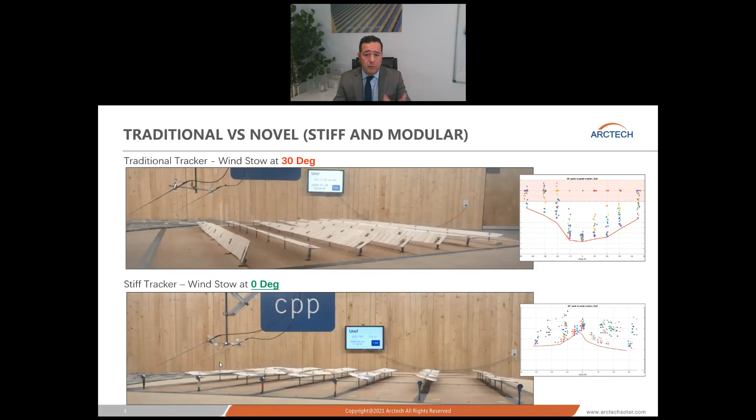Just two more notes on this one, because I presented all these in previous webinars. If you guys are curious, just reach out to me, and we can take a deeper dive on this one. But basically, it's important. Let me just stop this. It's distracting.

If you compare these two maps, these are the stability maps for the traditional flexible tracker, and the stability map for a rigid tracker. And what you can see right here is that the worst ever position for a traditional flexible tracker is when the tracker is flat. You can see the lowest critical wind speed. Critical wind speed is the wind speed upon which the tracker starts deflecting too much, okay? So the worst tilt is around 0 degrees, okay? On the other hand, the best tilt here is around 0 degrees, okay? So you can see that by just rigidifying the tracker, the dynamic behavior changes completely. I'll come back to this later.

A few numbers for you. So, these are typical numbers of all traditional trackers in the industry right now. By the way, this was our old Skyline tracker. It was very typical to mount this Skyline tracker in a 3-string configuration. So you used to have like a 100-meter tracker with a fixed point in the middle. So kind of like a 50-meter wingspan on either side. And those trackers must stow at a steep angle, either 30 degrees or 45 degrees, as you can see here.

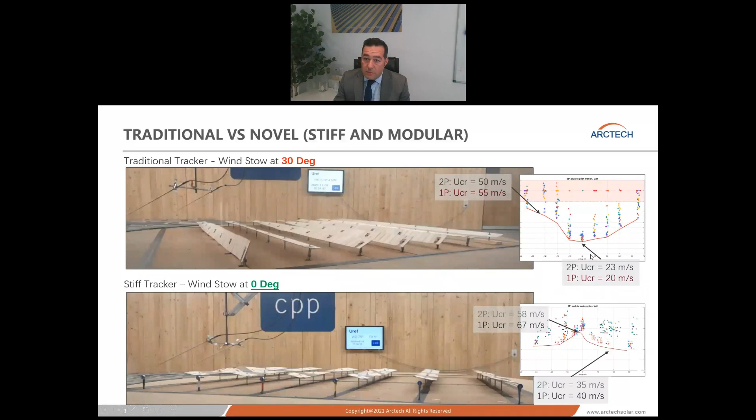Now, instead, these trackers right here that are very rigid, for starters, their minimum critical wind speed is larger. So we went from a minimum in the 20s to a minimum in the high 30s. And then the location of the minimum is different. The minimum here used to be at 0, like I said before. And the minimum here in this one is at steeper tilts.

Now, just one more note, and without getting into heavy physics here, but what drives this effect is basically stiffness. And what drives the critical wind speed at steeper tilts is more damping ratio. So these trackers right here have just one fixed point, one slew drive in our case, and then plenty of dampers along the torque tube.

As a matter of fact, we use up to 6 dampers in the exterior rows and up to 4 dampers in the interior rows. Here, we have more slew drives, more fixed points, no dampers whatsoever. And that's why you observe these small drops right there. Because if we were to put more dampers, this would likely be a flat line. Okay?

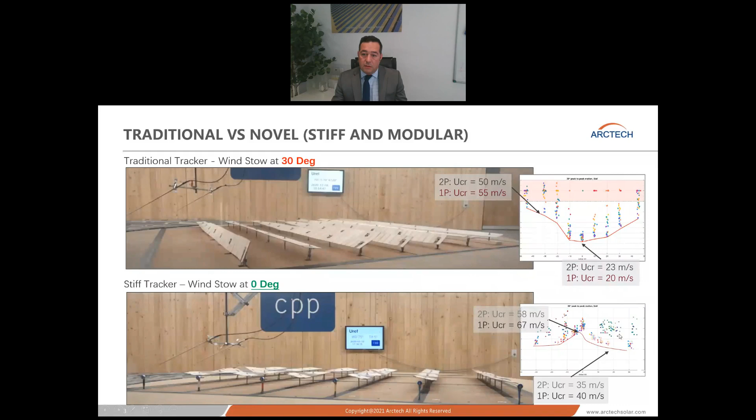Well, anyways, moving on. So, why should we use rigid trackers today in 2022? Like I said, because we have the highest stability at all tilts, and because it protects the panels. And we're going to talk about the panels a little bit, but if you remember, the panels used to be a 2 square meter surface, 2 meters by 1 meter, and today panels go up to 2.4 by 1.3.

That is 56% more surface, which means that, when the wind comes, the effects on that larger surface are much more severe. We are all familiar with that old IEC limit at 2400 Pascal, and we have to do load tests at up to 2400 Pascal. Guess what? Not one of the new panels withstands 2400 Pascal if you mount this tiny purlin right here at 450 millimeters. So those ratings have come down.

So if you keep stowing your trackers at a steep angle, you are putting your panels in trouble. As a matter of fact, you are generating damage to your panel, and that's that. Okay, so I'll talk about that in a little bit. So these two things are problems that stiff trackers resolve. The third thing is value that the stiff tracker brings. If I have a very rigid tracker that does not deflect, I can stow that tracker flat, and I can increase its wind stow threshold.

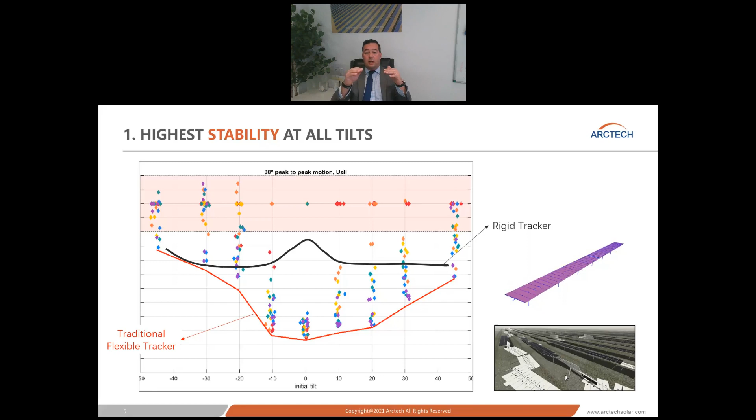Now, if you have a rigid tracker, this is how the curve looks, superimposed. Okay? Like I said, at 0 degrees, it's actually the highest critical wind speed, but anywhere else, it's much higher than the red line. So that's why I can increase my stow threshold, because I'm so very far away from the black line, and I have no problem whatsoever. If you have a traditional flexible tracker, and now you mount larger panels, your red line actually shifts down. So your wind stow needs to shift down as well.

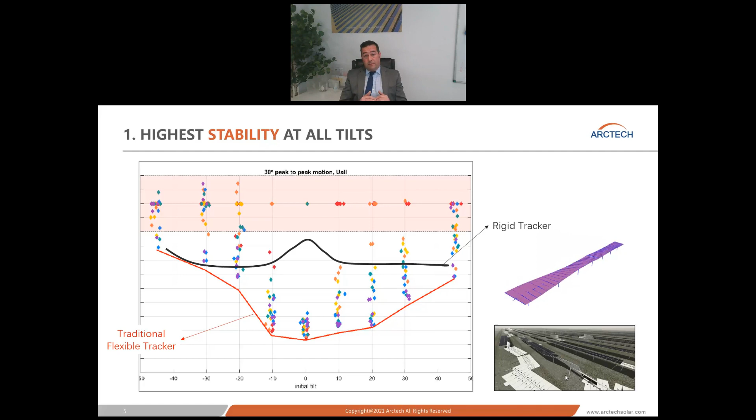Okay? First thing. Second thing, this is what happens to panels if you insist on stowing them at steep tilts, at 30 degrees and 45 degrees. If you have a traditional flexible tracker, you must stow them at steep tilts. Otherwise, your tracker flies away. That's not good because, after the windstorm, there are no assets. Not good, right? But you also must protect the modules.

So people that still install traditional flexible trackers, they go and they swap panels after the windstorm. Maybe you don't see damages, as we're seeing here in the picture, which happen, by the way. But other common damages are cell delamination, micro cracking. So after the windstorm, you go to your SCADA, and you see a bunch of strings that are performing at 80%, at 60%, 70%. Guess what? The panel has damage. It's just not visible damage, but people will go swap panels. So I don't think you want an asset to actually go swap panels after every windstorm.

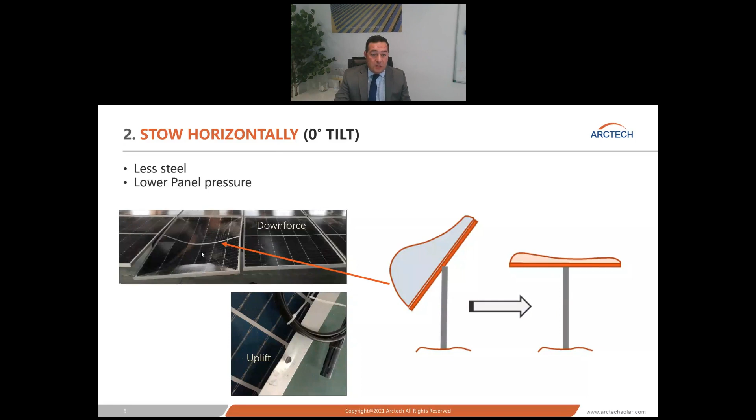So we should be protecting our panels. And the only way to protect our panels, our large format panels, is to stow the tracker flat. Again, you can only stow the tracker flat if you have a rigid tracker. Otherwise, the tracker goes away, right? So that's why these rigid trackers are so important. Well, assuming that everybody understands that, now let's talk about the value.

So this chart right here plots wind speed on the horizontal axis, and this is tilt, stow angle, okay? And what you can see, this is for a given site.

These little numbers here are energy losses that you have comparing stowing at 0 at a very high wind speed, like the top corner right here, or stowing at the steep tilt at a lower wind speed. So for this given site, we're talking about negligible losses, to losses in the 2%.

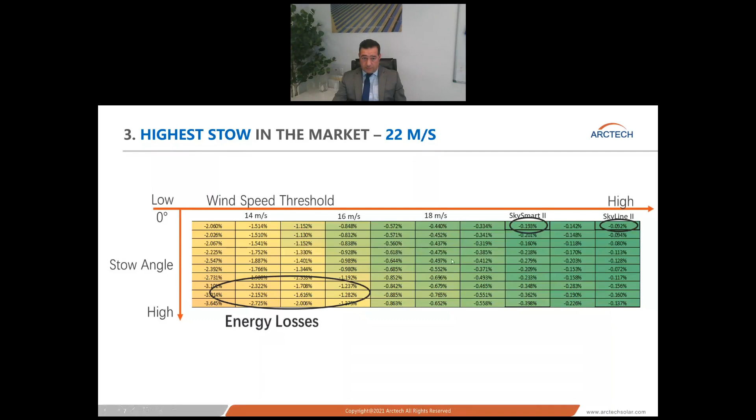So we went ahead and we did a case study here for a site in Amarillo, Texas, a 100 megawatt site, and we compared 5 different trackers. The first 2 trackers are Arctech trackers, our 1P Skyline 2 and our 2P SkySmart 2, both stow at 0 degrees. Our 1P at 22 meters per second, our 2P at 20 meters per second.

And then we compared with common practices in the market: 2 trackers that stow at 30, 16 and 14 meters per second, and 1 tracker that stows at 45 at 12 meters per second. Let me tell you that these two stows right here are the most common right now with large modules.

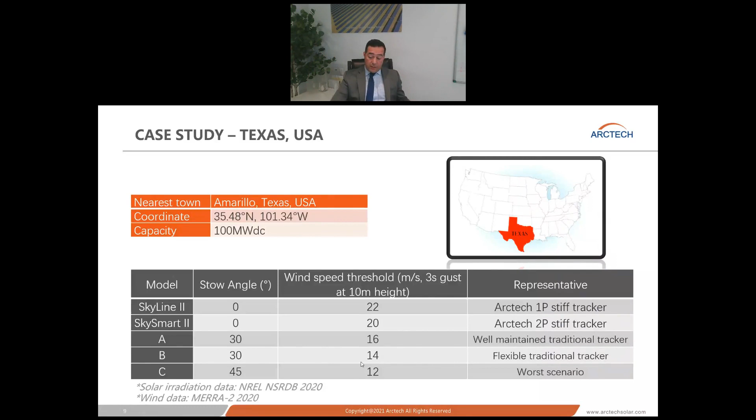Okay, so we obtained for this site the wind speed distribution and the solar irradiation at the same time. And then basically, we did this analysis where we calculated the amount of hours that were beyond the wind stow threshold. For instance, if this is the wind speed distribution, and I am stowing at 22 meters per second right here, basically I am not tracking the sun in all these hours to the right of this threshold.

If you compare that with tracker C, I am losing all these hours right there. And that's what this table is showing you, right? So for instance, for this particular site in Amarillo, our Skyline 2 only lost 15 hours of tracking the sun, while tracker B lost 600 hours and tracker C lost almost 1,300 hours.

Okay, so you can see that as you move left, you are in stow more and more often. Well, at some point, if you are in stow so much more often, what's the point of having a tracker? Just put fixed tilt and be done with it, right? So the intention here is actually to show everybody the effect of lowering your wind stow threshold, which all traditional trackers are doing because panels got larger.

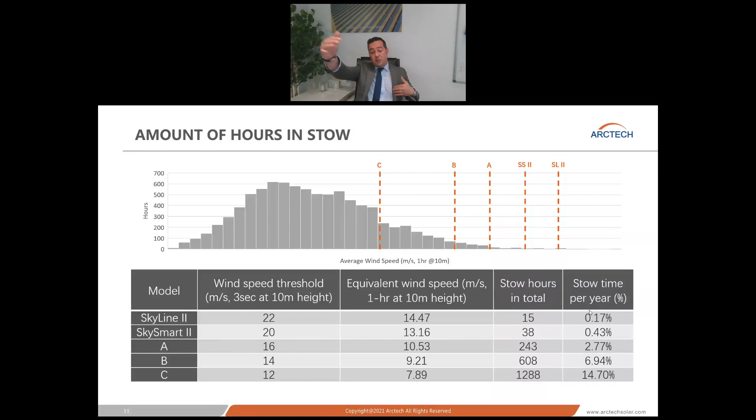Okay, moving on. So then how did we compute that energy? Well, you are probably familiar with these curves. The orange curve is the energy generation of a perfectly tracking day. And then the other curves are energy generation curves for fixed tilt. This green one is fixed tilt facing east, the yellow one fixed tilt facing west, and the center one is fixed tilt facing south, okay?

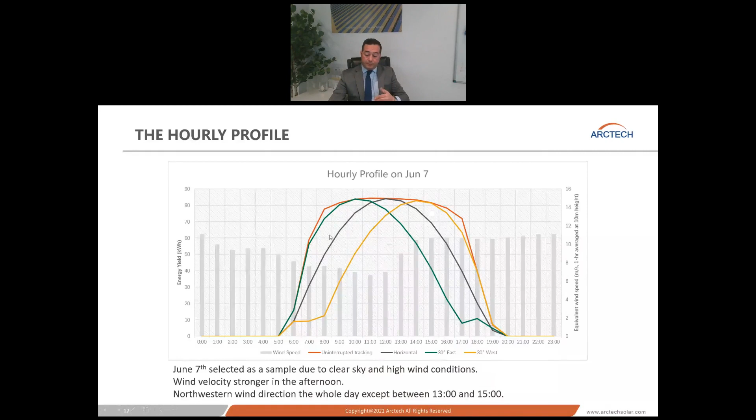So what we have done in this exercise was, okay, if my tracker did not go to stow, I produce according to the orange line. This is my 100% production. If my tracker goes to stow, either at 30 or 45 degrees, I get the 30-degree line, and I use that instead, okay? Now, what happens if we stow at 22 meters per second? This is a given day. We have done this for all 365 days of the year, and then computed all the energy.

But just to explain the methodology here, in this day right here, the wind speed is represented by these gray columns. And you can see that, if my threshold is up there, the wind speed has never been higher than my threshold. So I had 100% generation, okay? So if I were to stow at 20, same thing.

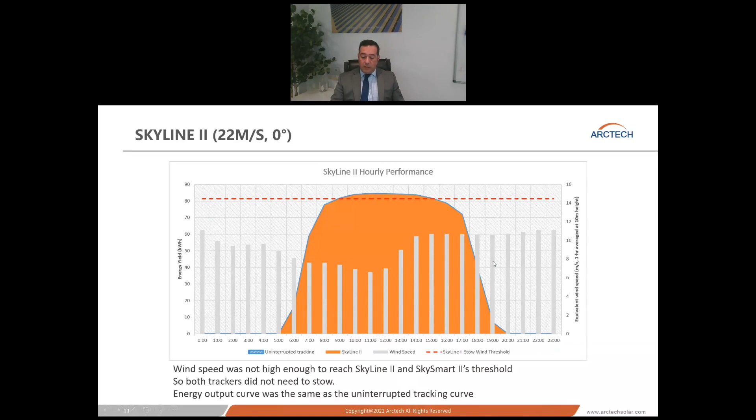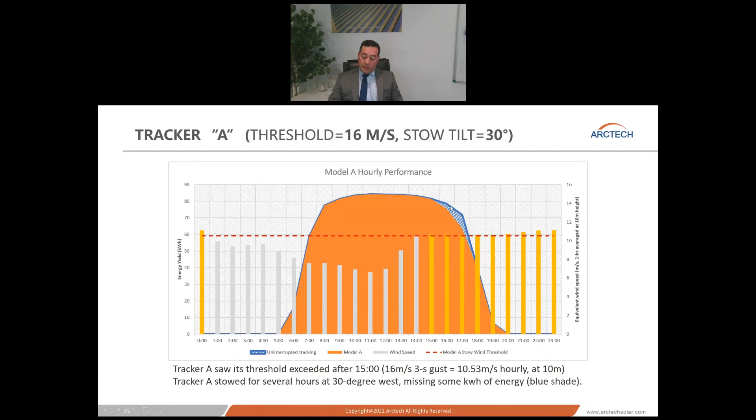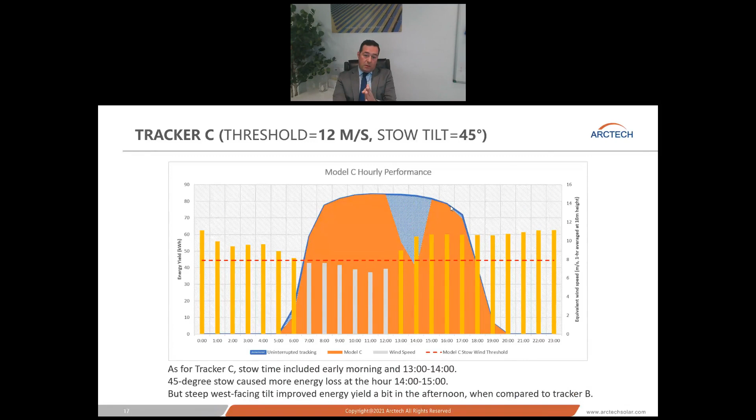If I were to stow at 16 meters per second, like tracker A, I had to go to stow a little bit. So I lost that blue shaded area right there, the difference between what I generated in orange and the perfect tracking in blue. If I keep lowering the threshold, I will be in stow even more hours, which means that I will lose even more energy, right? And even more at 12. Okay? So this is what we have done for Amarillo, all 365 days of the year.

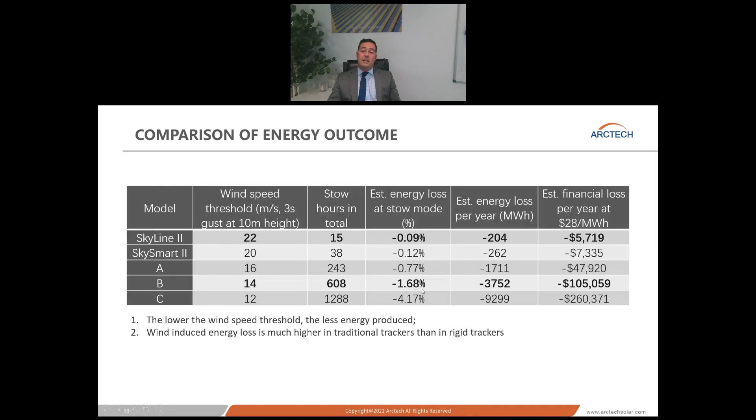And then we came up with this summary table. Okay, so Skyline, like I said, lost 15 hours, which was 0.09% of the possible energy available. And if we compare that with a common 14 meter per second tracker that lost 600 hours, that's equivalent to 1.68% less energy.

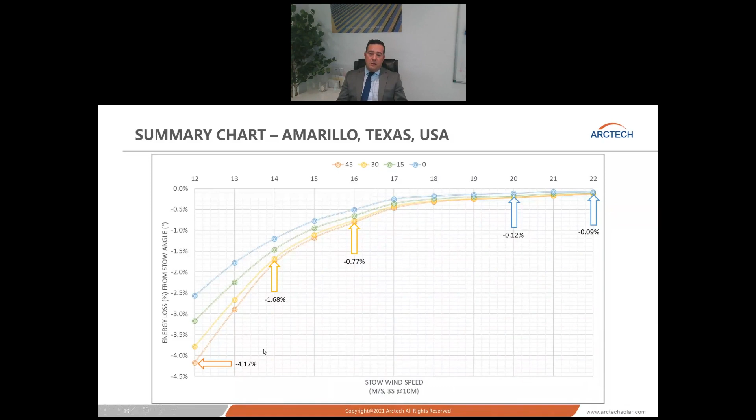Well, we put some numbers together, and again, I'm not a financial guy or anything, so I won't go through all these numbers. But I would just like to catch your attention to the 1.6% less energy that you produce if you are stowing at 14 meters per second at 30, when compared with our product at 22 meters per second at 0. So 1.6% more energy is equivalent to a 0.168% IRR.

So many of you will understand this because you probably deal with financial models. Many others of you will say, yeah, and so what? What's 0.168%? Is that a lot? Is that much? Well, we flipped the question upside down, and we said, okay, wait, if I have this tracker right here, this 14 meters per second tracker, and I need to have the same IRR, how much cheaper does that tracker need to be so I'm on par with the IRR? And we arrived at this 1.3 cent figure.

In other words, what I'm trying to say here is, if you only trigger stow at 22 meters per second and you stow at 0, when compared with the norm of 14 at 30, you generate 1.6% more energy, and this is equivalent to an upfront cost that is 1.3 cents lower than your typical tracker. So if you want this tracker to be on par with this tracker right here, this tracker should be 1.3 cents cheaper. So the value we're creating here for Amarillo, Texas is 1.3 cents per watt.

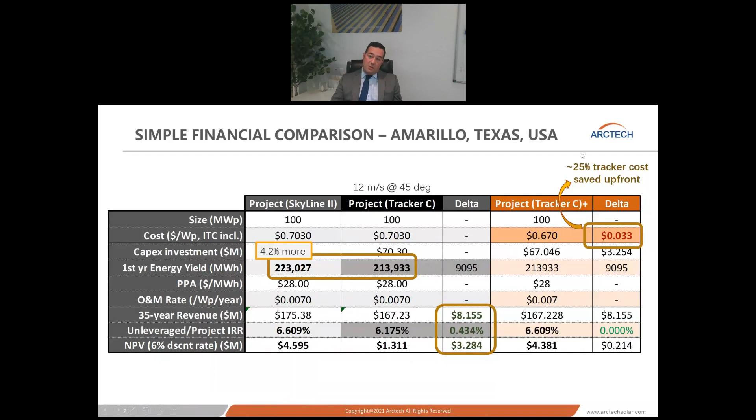And 1.3 cents per watt, in the case of the United States, is about 10% of the tracker cost. So just by enabling a smarter stow strategy, we're creating value that is equivalent to 10% of tracker costs. We also ran the numbers for another common tracker. And here we'll be talking about 3.3 cents, which is 25% of the tracker cost saved up front in the US. Huge.

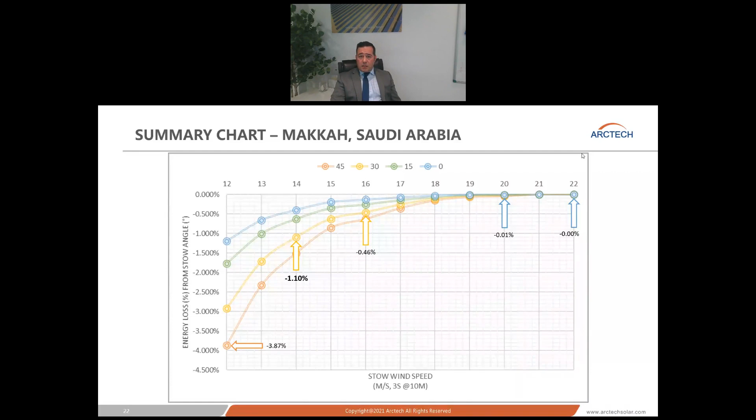Well, not to tire you with many charts, I have two more locations that are very, very important for trackers, where trackers are very common. We had Makkah in Saudi Arabia, and here we only generate 1.1% more if we compare with the typical 14. So that's equivalent to only 0.7 cents. It turns out that that's the same 10% of tracker cost, because when you go do projects in Saudi Arabia, costs are much lower. EPC costs, tracker costs. So again, the value is still 10% of tracker cost up front.

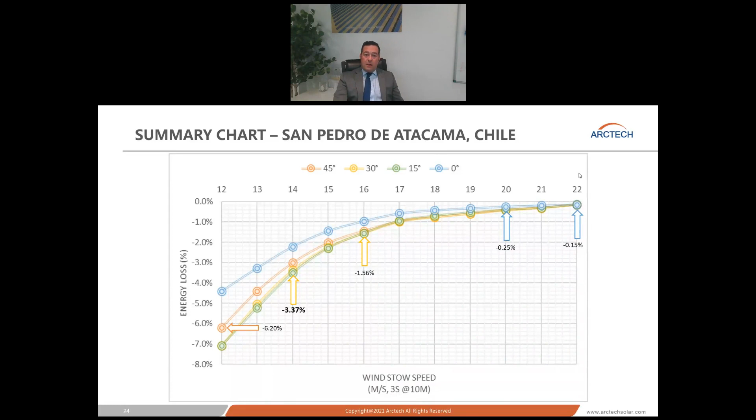Now, on the other hand, you go to Chile, in the Atacama desert, in a place called San Pedro de Atacama, where you have the most sun in the world, say, and comparing our standard 22 meters per second with the common 14 at 30, you generate 3.3% more every year. And this is so big. Watch. This is 2.4 cents, which in Chile means 25% of the tracker cost. Very large.

Okay? So in conclusion, traditional trackers are getting obsolete. They don't work that well with large format modules. If you really want to protect those large format modules, you should stow your tracker at 0 degrees. What's the only way of doing that? The tracker must be rigid. Because if it is not rigid, you will have module problems and you will not generate that much energy. So rigid trackers not only fix problems, but they also create value.

And we gave the practical examples of stowing at 22 meters per second in 3 locations. And here I actually plot 14 meters per second at 30 degrees and 12 meters per second at 45. And you can see the value created up front, right? So I presented you these 2 cases here, the 10% in Makkah and the 25%. I mean, if we go compare with 12 meters per second at 45, it gets very, very large.

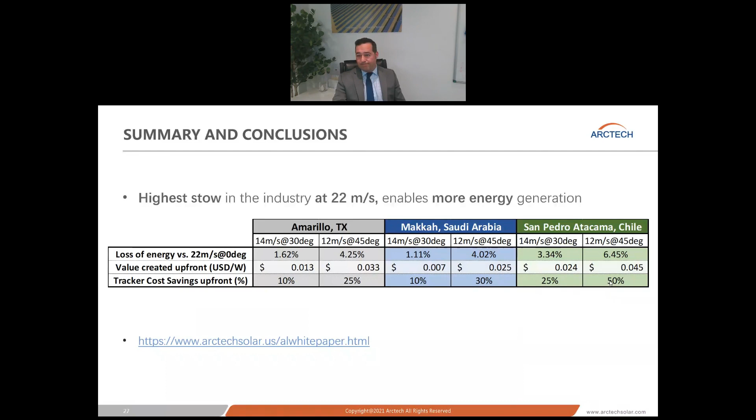Actually, if you could stay on for just one second before we get to Cesar, I wanted to ask one question we had put in here, and it was specifically on your slide, which used the Durst curve.

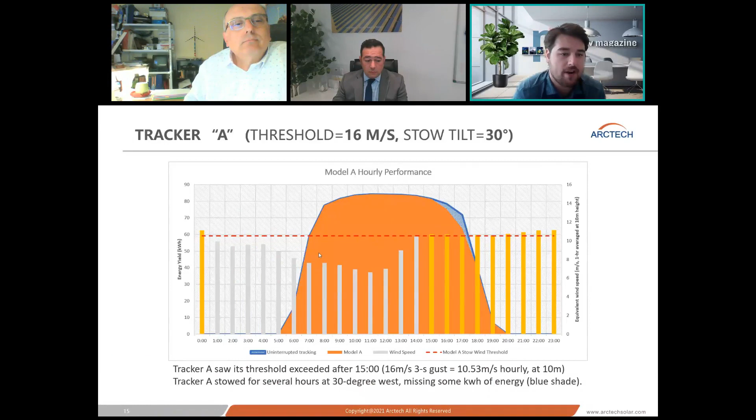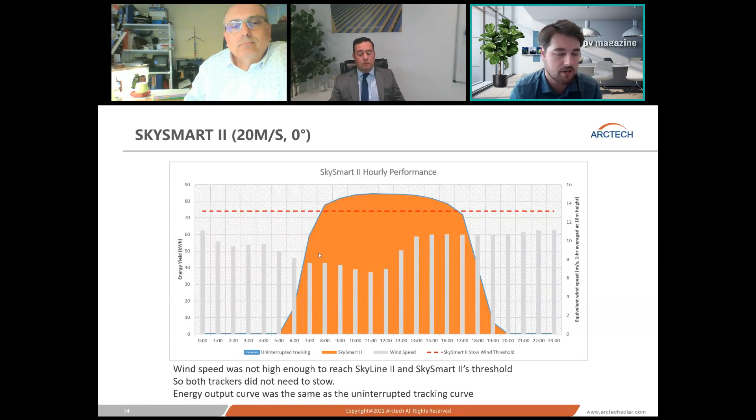So the question was, the usage of the Durst curve is only appropriate if the analysis assumes that the high tilt angle stowing tracker does not reset for an hour after the wind speed threshold is exceeded. Is that an assumption you made knowing that that's how operations in the field are? Or could you kind of walk through your specific usage here?

We could not do a direct relation with what happens in the field, because several trackers use different strategies. People typically do not wait for 1 hour. They have lower thresholds. So the point here is not to be accurate to the hundredth of a percentage. The point here is to present a methodology that then, fed with the specific data of the tracker we are trying to evaluate, could lead to an accurate megawatt hour figure.

However, the comparison, the qualitative data, when we compare 22 meters per second at 0 and 14 at 30 degrees, is very, very true, because you lose energy in these magnitudes of 1 to 2%, if not more, in Chile on the 3-4%.

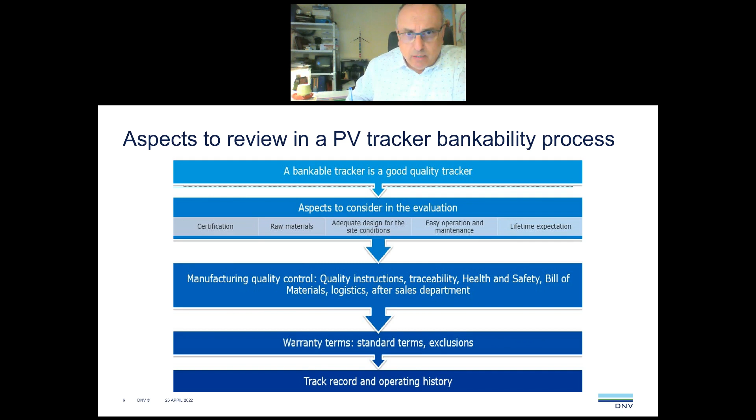And also, the most important thing many times is to understand what is the track record and the operational history of the tracker, because you may have all the items before almost perfect, but if the tracker has no track record or a very short track record, then the bankability process can be in problems. You can have problems to get bankable, because you need an operational history with problems in order to improve and then to have a stable product in the market.

Okay, so let's move to the next slide. Yeah, this is a zooming into aspects. Before I was mentioning a few of them, but you can zoom into them even more. Here I have 24 areas. Typically, we score every area, but the 24 areas can be expanded up to 70 parameters, technical parameters, in order to have a benchmarking comparison of the trackers.

And as you can see, there are three trackers here, tracker A, B, C. It's difficult to say which one is the best one. As you can see, there is no price here, by the way. It's only technical aspects. So on the technical aspects, it depends if you are more interested, for example, in the quality certification. Probably this tracker is going to be the best one. But if you are interested in other items, you will be selecting another tracker.

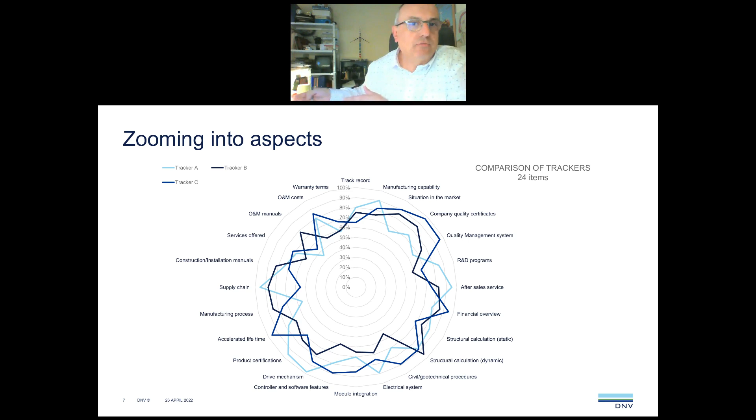So the message here, when you put this benchmarking comparison, is that the best tracker is a relative term, because sometimes you will prefer one tracker because you are interested in particular items that for your company or for your organization are very important. But on other occasions, you may look for another kind of tracker. So it has to be analyzed on a case by case situation.

Okay. So regarding building codes that I mentioned before, unfortunately, we don't have a building code for PV trackers. So we have to use the civil building codes, that in Europe is Eurocode, in North America is ASCE. So yeah, the typical building codes used for buildings.

So obviously there are some differences, and you need to know the finite elements, like here we have a joint of two sections of the torque tube, a square torque tube. You need the finite elements in order to tell you not only if the strength of the metal joint is going to be enough, but if there is any point at the joint that will be in danger, because there is a red color where the concentration of stress is going to be too much.

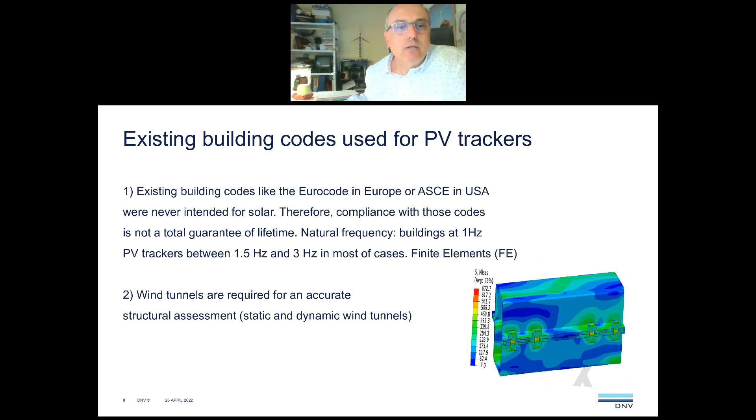Okay. And then the wind tunnels. I will not talk much about wind tunnels because I like very much the videos from Pedro. So that is giving a lot of information. Basically, the aeroelastic instability that Pedro was mentioning, buffeting, vortex-induced vibration, aeroelastic deflection, all these things.

Basically, what it means for you as a user of the tracker is that you can have a failure even if the wind speed is below the design wind speed. So even if you have, for example, a tracker that is going to stow at 20 meters per second, at 12 meters per second you can have an amplification of the loads due to the aeroelastic instability. So if your tracker is not stable, you can have this amplification of the loads.

So that is why it's so important to analyze this in detail. But today in the industry I think it is well known, and everybody knows what is happening. So it should not be new for the tracker manufacturer when you are asking for this information, of course.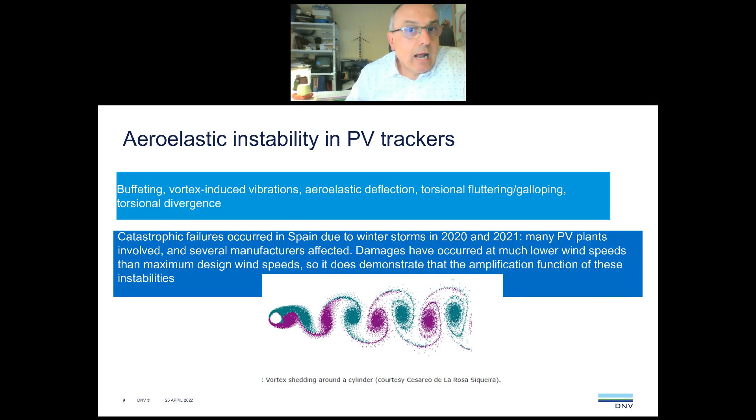Okay. So I was mentioning before that the certification is not enough. And you may think, well, why is this guy saying that it's not enough? I have the UL 3703 certificate. I have the IEC 62817 certificate. These are the two main certifications for the tracker. So my tracker is perfect.

But if you look at the small print of every certificate, the UL certificate is more for electrical safety. It is not considering wind and seismic conditions and nothing about the structural integrity of the tracker. So the UL is not valid for the structural calculation. And if you go to the IEC, you get almost the same.

The IEC is repetitive testing in order to detect infant mortality problems, so early failure situations. But the IEC 62817 is not designed, is not conceived for the assurance of a long time, a lifetime extension or something like that. So you need to consider that all the tests are to detect infant mortality problems, not for the lifetime of the project, for the lifetime of the tracker.

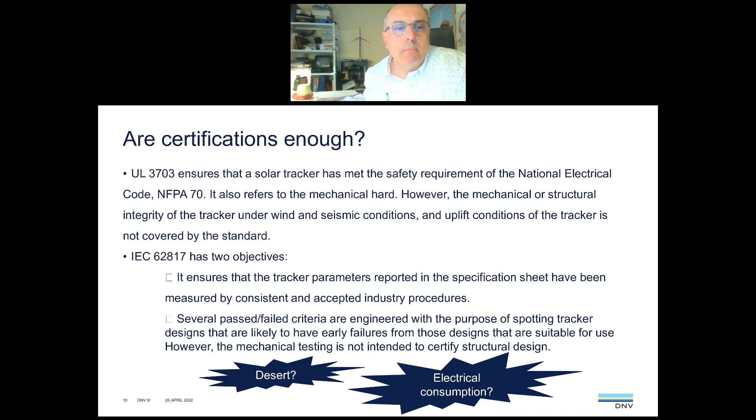Okay. And then another aspect that you should consider when talking about trackers is who is going to construct your PV plant. Typically, it's going to be an EPC contractor. So the manufacturer of the tracker is not involved in the construction. So if there is a problem during the construction or during the commissioning, the EPC contractor can say, well, it's not my fault. I did all my work perfectly, and it's a design problem coming from the manufacturer. And then you are in the middle. You don't know who is right, who is wrong.

So for that reason, we recommend that you involve the manufacturer, with installation manuals very clearly defined in the EPC contract, and that you have a commissioning checklist by the manufacturer as well, in order to have the manufacturer with you during this particularly important phase of commissioning, and especially regarding the soil conditions, so that the manufacturer is aware of the soil and geotechnical conditions, to avoid any problem with the foundation in the future.

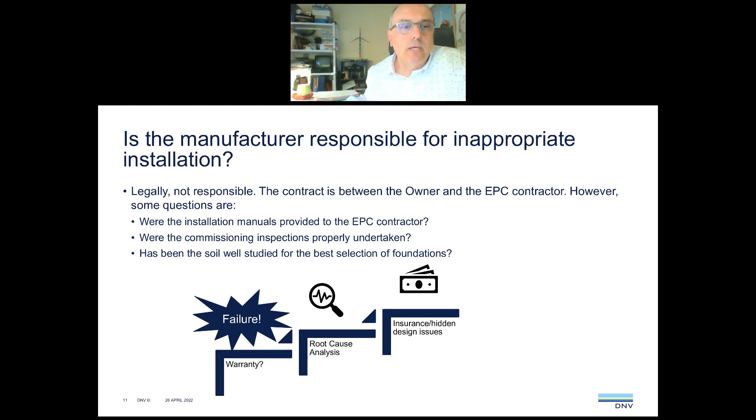So the soil conditions should be clearly stated in the contract, and the EPC contractor should be aware of the soil conditions, with the tracker manufacturer involved as well. So that's a problem that is quite frequent today.

Another issue is the 3D backtracking algorithm that is very popular now, because PV plants are constructed in complex terrain, not flat terrain. So moving all the trackers at the same time is from the past. Nowadays, the trackers move individually in order to compensate the shading from one tracker to another. And this gives you a boost in your production that we have evaluated in a few sites, that can be 1%, for example, for slopes from 4 to 6%. So for medium complexity or easy sites, you can get up to 1%.

It is sometimes not included in the capex, so you will need to pay for this additional 3D backtracking algorithm, but it's going to be worth it. So I recommend that you check with your manufacturer if they can install it, if your site is complex.

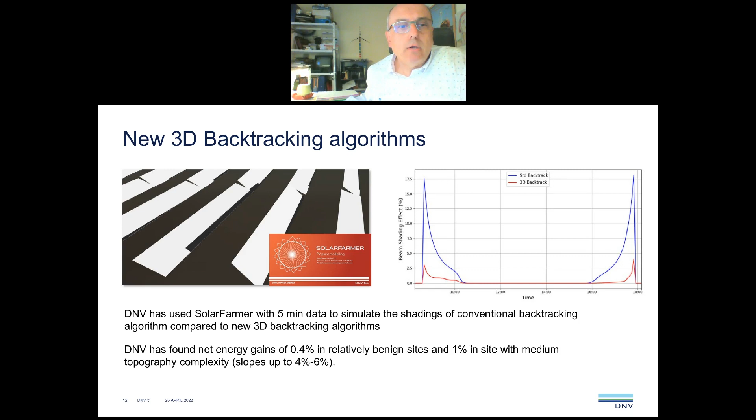Okay, and then we move to the stowing energy losses. We are analyzing the work that Arctech has done on this, and we are going to suggest improvements. But in general terms, we agree with Arctech that this particular loss has not been analyzed in depth in the industry. Many times it has been neglected, and it is quite significant. As Arctech has pointed out, we are not talking about a few hundred dollars.

Is quite significant. So we need to consider this on a day-to-day basis in our daily work as engineers, as consultants. We need to include the stowing energy losses, and my recommendation at the moment, without finalizing the conclusions, will be to compare options, because you can neglect scenarios that are the best or the optimum for your site. So you need to consider all the scenarios for your sites. So in that aspect we recommend it. Sorry.

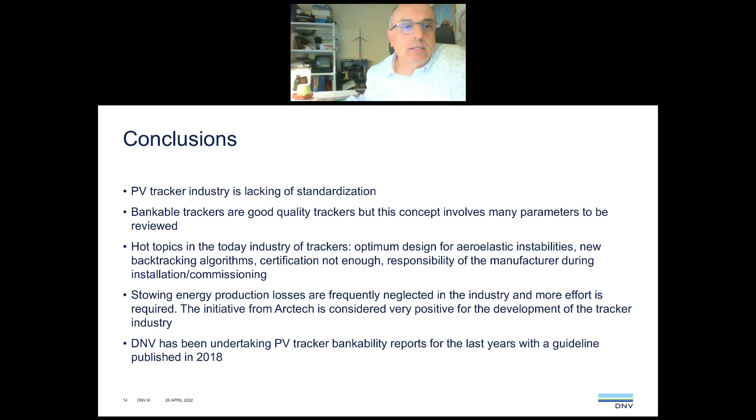And I think that's all, Tim. I can pass the floor to you. Thank you very much. Thank you very much, Cesar. Excuse me, I appreciate your presentation, elevating and showing the real world financial comparisons, and providing that perspective on what Pedro already laid out for us here.

So with the few minutes we have left, I want to move into a couple of audience questions, and we have quite a few. Starting with one right here, someone was asking about the cost of having 2 fixed points or drivers. Does that really still lead to lower overall costs, or how does that factor into the total financial outlook of using a rigid tracker system? I'm assuming that question is for me, right? Yes, sorry. Right. That's a very good question, by the way. So I'm glad that the message is coming across.

So yes, increasing the number of drives. As a matter of fact, the example that I showed on my slides had 3 slew drives, not 2. So we moved from 1 to 3. That indeed increases the drive cost, because we used to have one 7-inch slew drive, and now we have three 5-inch slew drives. It's not that we multiply that cost by 3, because the slew drives have gotten smaller. But the overall drive cost has gone up.